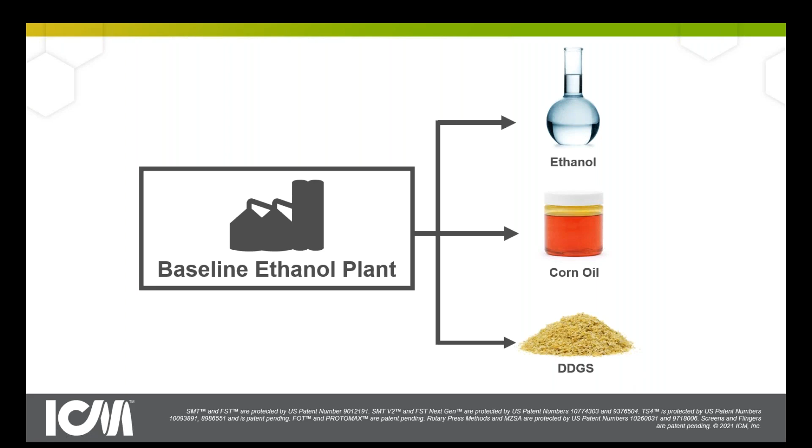And so as you go down to the bottom pile shown on this slide, you can see the dried distillers grains or even the wet distillers grains. That's really where we see the greatest opportunity for improvement.

A big reason for that is because DDGs are, our nutritionist likes to say, a perfectly imperfect feed. What they mean is it's a valuable feed component. It's the components of the corn kernel that have been through the ethanol process and now they've come out the back end and there's value there, but as they sit, it's a combination of the protein, the yeast, the fiber, and the oil that's not really uniform and perfect for any end user.

The industry has done a really good job over the last 20 years developing markets and maximizing the value of it. I talk to producers now and they're getting 110, maybe 120% the value of corn out of their DDGs, and that's great. But as that stands, there is the opportunity to do things a little better.

But standard DDGs, in terms of having an opportunity into the highest value, highest opportunity markets with aquaculture or pets or even beyond, there really is no opportunity for standard DDGs.

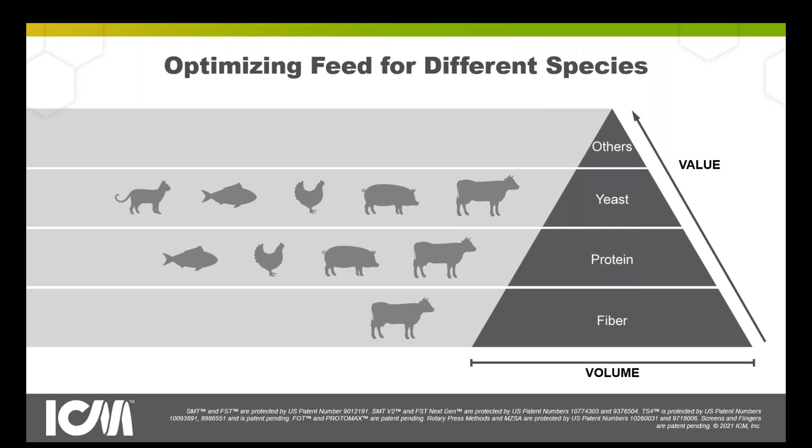That's really the focus of ICM's APP system. It's giving the ethanol plant, the biorefinery, whatever they choose to be called, the opportunity to diversify those feed products and maximize the value of that process stream coming out the back end of the plant.

So I want to focus on the protein moving forward. And we do get the questions of, is there demand for protein to go beyond? If every ethanol plant in the country adopted a technology to allow them to diversify their feed and produce a high protein feed, is that market going to get saturated? Is it going to decrease the value, or are we going to completely saturate it to where there's no home for it?

We like to confidently say that the opportunity for protein is about as close to unlimited as it could be, as you look at world population growth and just the opportunity for protein to continue to be a product in demand.

This is one study we like to reference from the FAO Agricultural Outlook, where they talk about by the year 2030, there's expected growth in beef, swine, and then the poultry and the aquaculture, getting up into the 19%, 13% growth, 43% growth, 35% growth. That's significant growth expected for these markets.

I also get questions on some recent news with the soybean meal facilities that are being built. Those are all really good projects, I think, that will be going on. But as there's more soybean meal out in the industry, there's still going to be a value for a corn protein coming out of an ethanol plant. We like to say that as the soybean meal has a certain price point, there's a pretty consistent history of there being a spread between that soybean meal and distillers grains, and then even to corn.

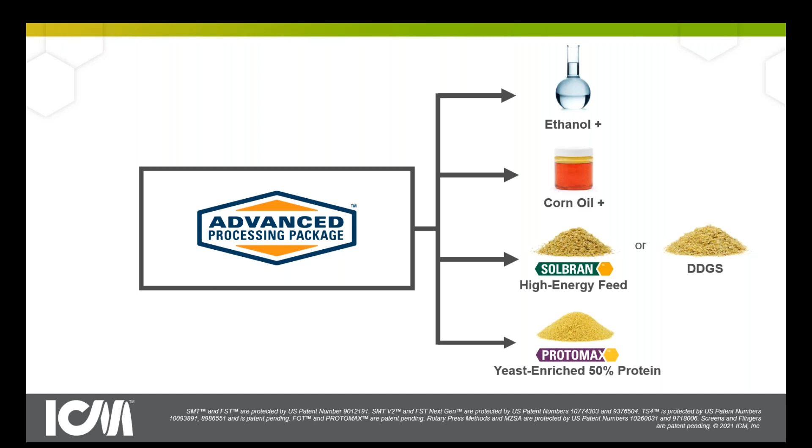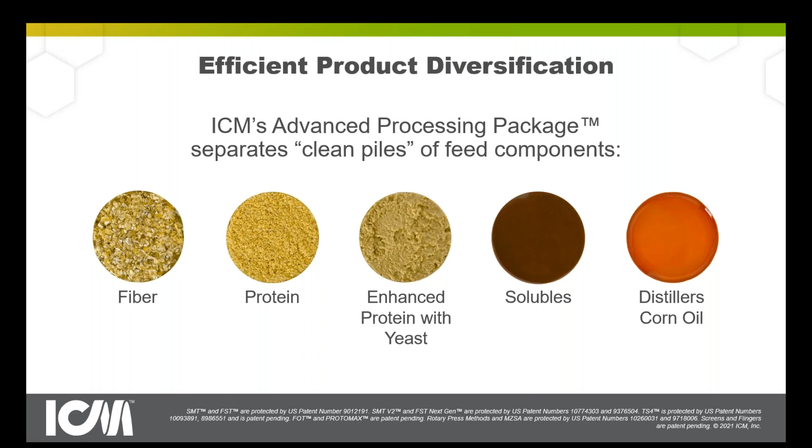So this is a transition slide. I'm showing you essentially the dots or pictorials of the clean process streams that are going to be flowing through the ethanol plant that has our APP system in it. We're going to have a clean fiber pile, a concentrated protein pile or process stream, an enhanced protein with yeast process stream, and a different and new solubles or syrup process stream, and the distiller's corn oil. You're going to see on these next few slides, as I show some process flow diagrams, where these play and how they are separated out within the ethanol plant process.

Before I go into that, I'm going to start with just the baseline ethanol process, kind of an ethanol 101 type slide, and focus on what we're doing with the mechanical, chemical, and biological systems in place. Then we'll talk about how when we add the APP system, we're really just adding capabilities for particle size separation and density separation to plug and play within this process stream.

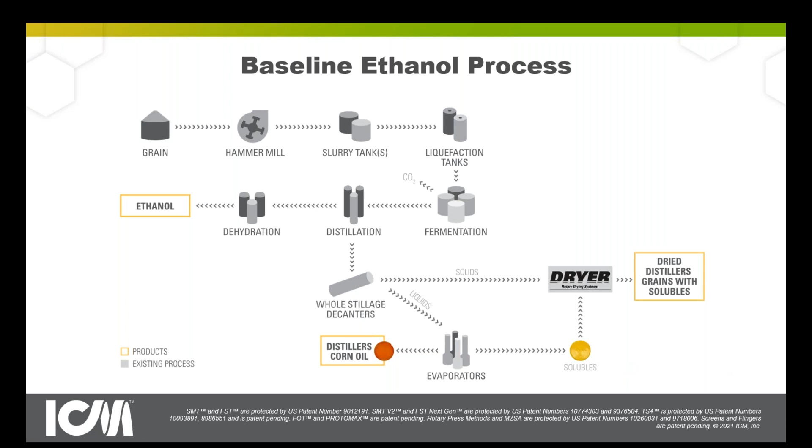So this is the base process flow diagram I'm going to be using. As I go to the next slide, boom, we're going to drop the APP process right on top of it.

Now, as I move into each one of these technologies, I'm going to advance the slides, and we're going to see these highlighted in green, which gives me a slide or two for each technology to talk about them a little bit independently.

Each one of these technologies does provide value on their own. The selective milling technology we've put into 40 plants or more, and we've seen significant benefit from that. But what I'm talking about mainly today, due to time and focus, is how these technologies plug together and play together within the APP system, driving us towards those high value, high protein products.

So as we highlight the first one, we're going to highlight the front end of the plant, and we highlight not only the SMT system, but the milling as well.

One of the key things we want to do within the APP system, since it's fully integrated and we're looking at doing separations throughout the entirety of the plant, is we want to start at the very beginning and not make a powder, not make a really, really fine product out of the dry kernel corn if we don't have to.

So the first thing in terms of process flow from front to back, chronologically, is with the milling, we're going to do an adjustment to the plant's dry milling system and give them an upgrade that allows them to do the same thing in terms of preparing the corn kernel for conversion to ethanol, but in a way that does not break down the particle size of the fiber.

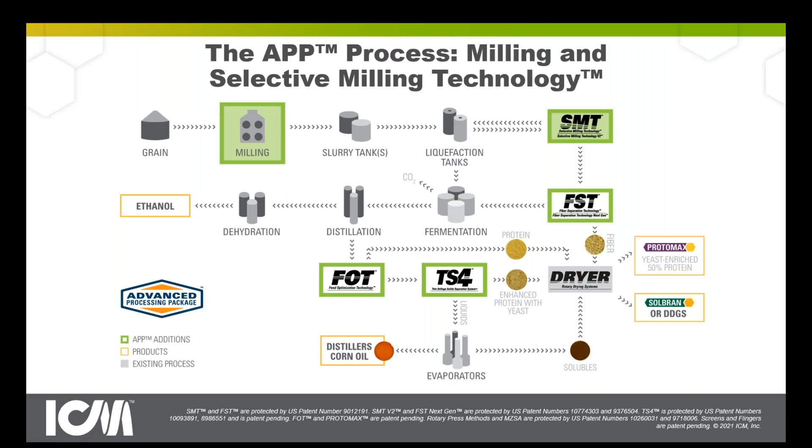And then moving forward, the SMT is a selective milling of the wet process stream, and so that brings a benefit with it as well.

But anyway, we're doing a wet grind and a nice aggressive grind of the larger particles in the liquefaction flow that have the most opportunity. Those larger particles have the most opportunity of passing through the front end of the plant, not allowing their starch to be broken down and available for ethanol conversion, or it's protein and fiber and other larger particles that are bound together and not able to be separated like we want them to be. So our SMT does a good job of doing that.

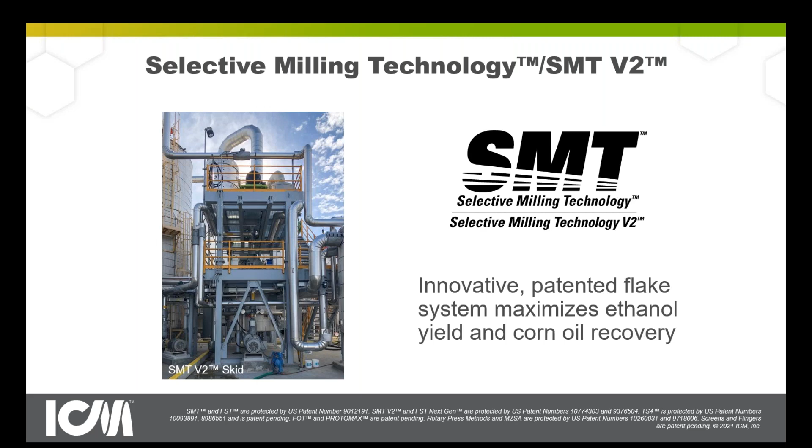And again, with the grind, our front end, what I'm going to call dry grind upgrade, we're able to get a right-sized grind. In this picture, if your screen's clear enough, you can actually see the larger sizes of the fiber, or the pericarp, which is that outer layer of the corn kernel. You can see that it's prepped and well set up to go through our separation devices on the front end of the plant, allowing that fiber to be cleaned and washed and separated without forcing a plant to try to separate a fine grind, powdery, broken down kernel of corn that brings difficulties along with it. So that's what we're doing at the front end of the plant.

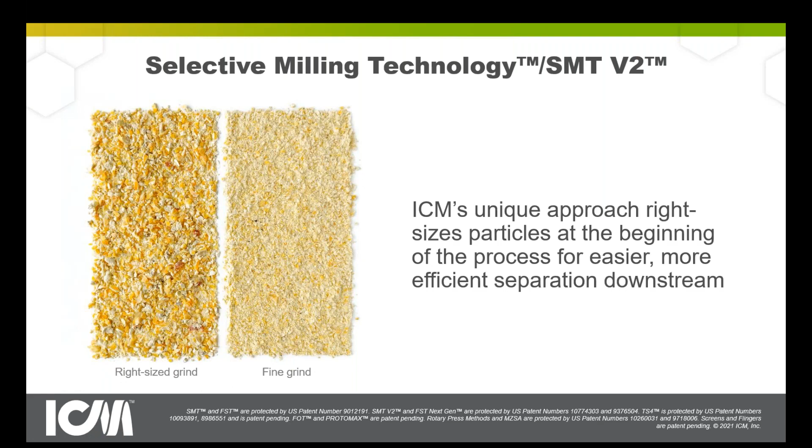From there, we're going to move into our fiber separation technology. So with our milling and our SMT, we've prepped everything. Prior to that, with slurry and liquefaction, we've given the necessary time and temperature, the opportunities for the biological processes to start, the chemical processes to happen. And now we move into our FST, and our FST is really a workhorse of the system.

The FST is where we are doing those particle size separations of the fiber and then doing a countercurrent washing of it, washing the protein, washing the starch, washing the fats and oils away from that fiber so that they can flow through to fermentation where they bring the most value.

And then that clean fiber pile can bypass fermentation, and it can bypass distillation. It can avoid the plate and frame heat exchangers that are involved with fermentation and the ones that come before it, and the beer mash exchangers. It can avoid the pumps. You no longer have the fiber providing wear, and it can avoid the beer column where really there's just zero value in the fiber being there. And so we take that clean fiber, we separate it, we clean it, and we allow it to bypass those middle parts of the plant.

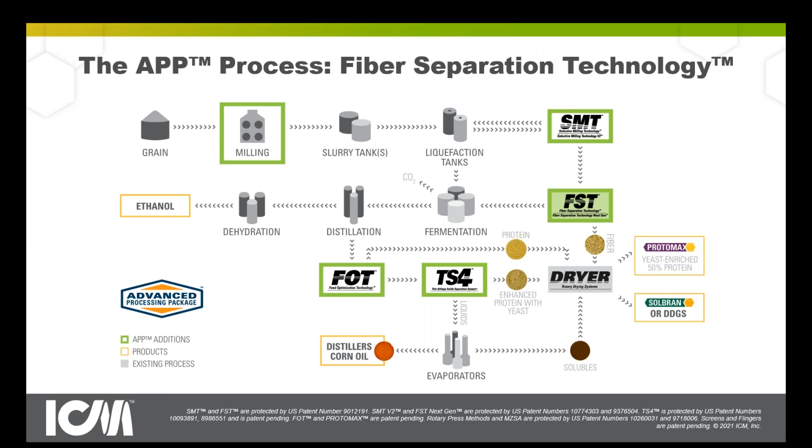Along with that, we bring that opportunity for increased plant rate. If fermentation, if distillation are a bottleneck for a plant, FST can bring up to 14%, a 14% increase in grind capability. So that's a pretty significant opportunity.

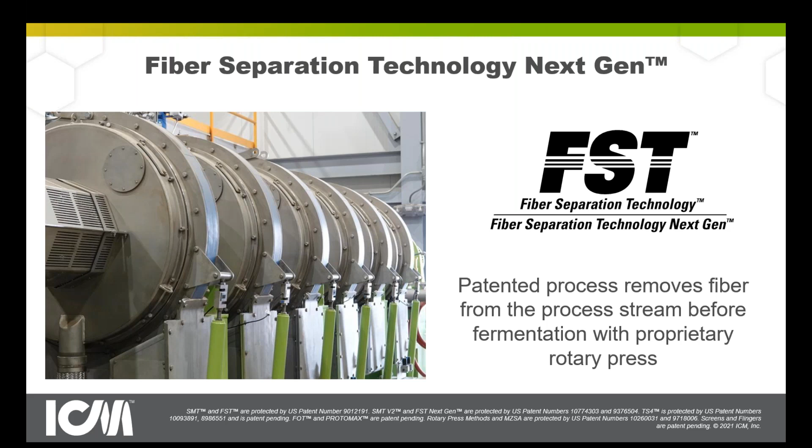And a couple of the other things FST is doing, off the back end of our FST system, as we're doing the dewatering and then the washing and then the dewatering, our final dewatering device is what you can see in the picture on the left. It's a rotary press. This is a very exciting piece of equipment. ICM's partnered with Fournier, that's one of our vendor exclusive partners that's been very strategic for us, and we've modified this system from the wastewater treatment industry.

And this is actually one of the highlights of the tours for me, one of the highlights of the tours as we have customers and other vendor partners come through our element plant. We get to the press and we've got a sample portal right there, and you can get a sample of this clean fiber. You can put it in your hand after it's cooled a little bit, and you can rub it together, feel how smooth and non-sticky it is.

You can tell that the sugars, the starches are just gone. The really cool part is it's now a process stream that is 40 to 45% solids, and that's what heads to the dryer or to the wet pad. If that's going to the dryer, that's a 40 to 45% solids process stream, which has significantly less water than what the wet cake would be coming off of a baseline ethanol plant centrifuge at roughly 35% or 36% solids.

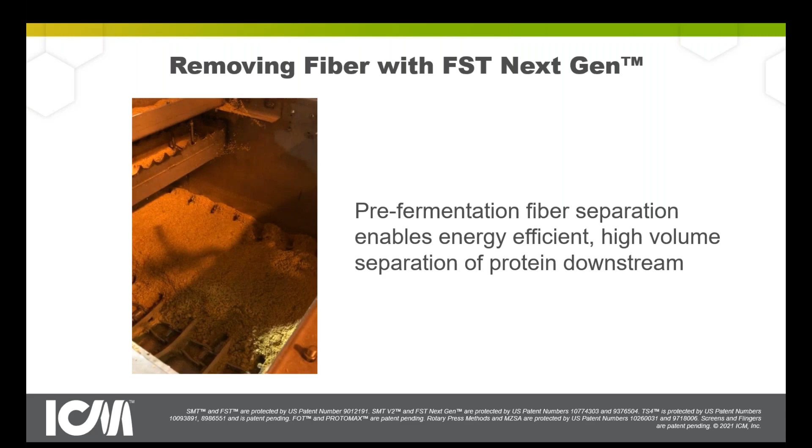So that's one of the key benefits of the system, and one of the ways we're able to reduce natural gas and provide some reduction in CI scoring is through that reduction in natural gas due to feeding the dryers a process stream with less water load. So that's our FST system, one of the key workhorses, with multiple benefits coming along with it as we separate the fiber in front of fermentation and distillation.

So now we'll continue to move and get to our feed optimization technology, or FOT. FOT is a really cool new technology, because what we're doing is taking the plant's existing centrifuges or decanters, that typically handle whole stillage, dewatering it and sending a wet cake to the wet pad or the dryers, and sending a liquid thin stillage flow towards the evaporators or back towards backset. We're taking that process step and upgrading those machines.

This is where we work exclusively with one of our other strategic vendor partners, Flottweg. So if a plant has existing Flottweg centrifuges, we're going to take those machines and modify the internals, modify the drives, and add a wash stage in the middle, basically turning that centrifuge step into a two-step process. We're able to do that due to those modifications we've made to the centrifuges.

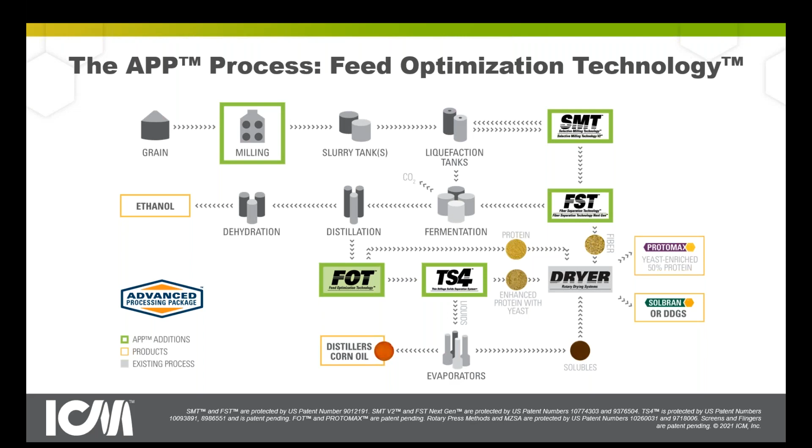For customers we're working with that don't have Flottweg machines, they've got a different provider. Most of those plants, or those specific centrifuges, are in a period in their life cycle where they're nearing their limit anyway. So we're going to replace those machines, add the Flottweg machines with new internals and new drives, giving them machines with increased capacity and increased ability to do a density separation, and have that run through the FOT process.

Coming out of the FOT process, I've got some other videos to show you. First, I'm going to show a picture of that new internal scroll, actually called an accelerator scroll from Flottweg. That's what that new internal bowl scroll looks like.

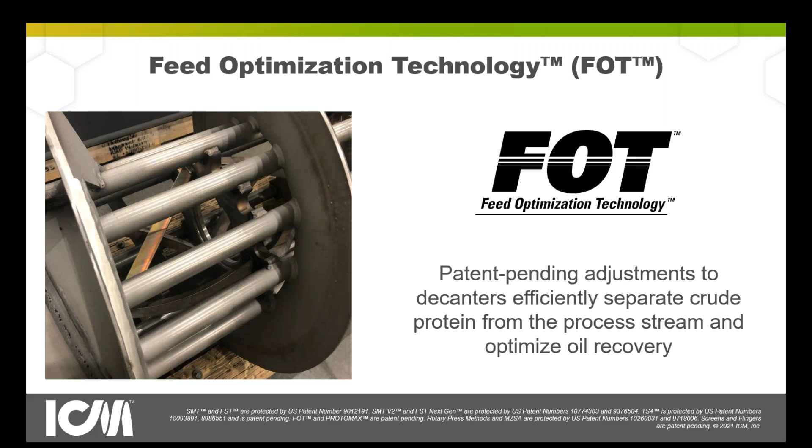So instead of having your normal cylinder-looking bowl that fits inside of the Flottweg machine, this is what it looks like, and you're able to get a deeper pond depth and do a more aggressive separation with this, as well as having more capacity within the machine. We'll go into that in more detail and depth in a future webinar.

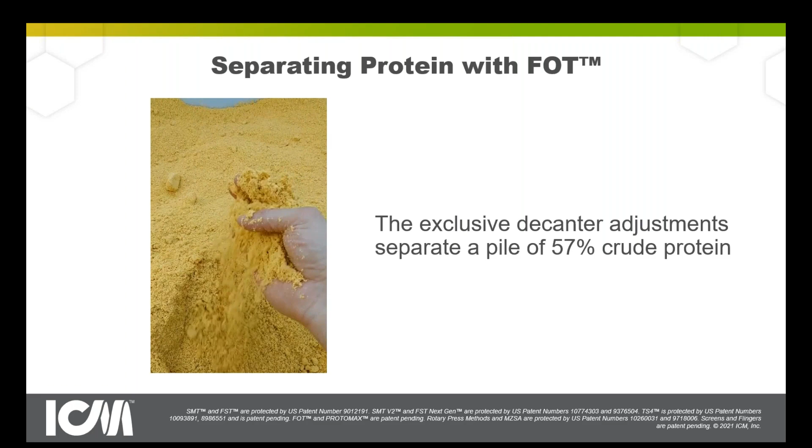This is Jeff Sharping's hand, I believe—I'm throwing names out here. But you can see how the wet cake, if it normally comes off a standard decanter, it's clumpy and it clicks together, and as it's feeding the dryer, you can kind of feel and sense the moisture load that's in there. This cake looks and feels a lot different. Again, this is another process stream we can show as we do the plant tour, and you just get that feel for how it's different and how it's a better process stream to feed the dryers. So that's a fun video to share.

And then after FOT—so I want to highlight, again, coming off of FST, we have the clean fiber pile. Now coming off of FOT, we've got the concentrated protein stream.

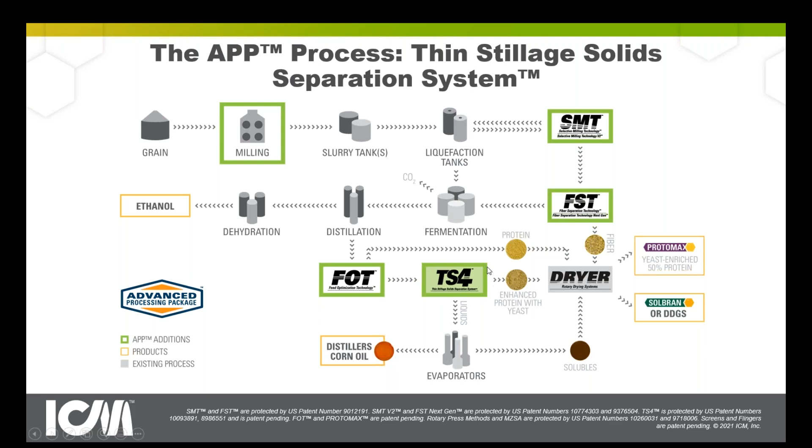And then the liquids that come off of FOT, that standard thin stillage process flow now without the fiber in it - that's what's now feeding our thin stillage solid separation system, or TS4. Chronologically, that's going to be the last ICM technology that we're flowing through.

What TS4 is, is another set of Flottweg decanters, Flottweg centrifuges, but these ones are actually Sedicanters - a little bit different machine, different setup. They're designed to give a greater G-force that allows us to do a more significant density separation on that thin stillage stream that has suspended solids that are lighter, fluffier, and more difficult to separate through a standard machine.

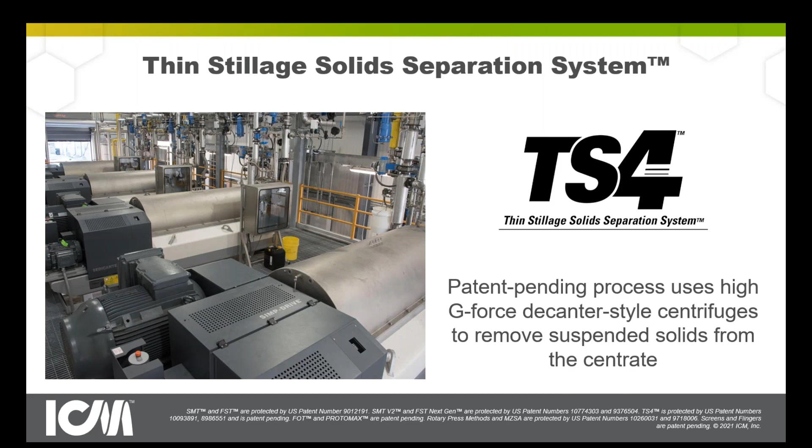And then the cake that comes off of these SETI canters, we call it SETI cake - this is the yeast-enriched protein concentrated pile. This is what it looks like as it flows out of the Sedicanters. You can see the almost soft serve ice cream type feel, and it flows really well back into the conveyors, mixing really well with that other concentrated protein stream we talked about that comes off of FOT. These combine together to produce the Protomax feed product.

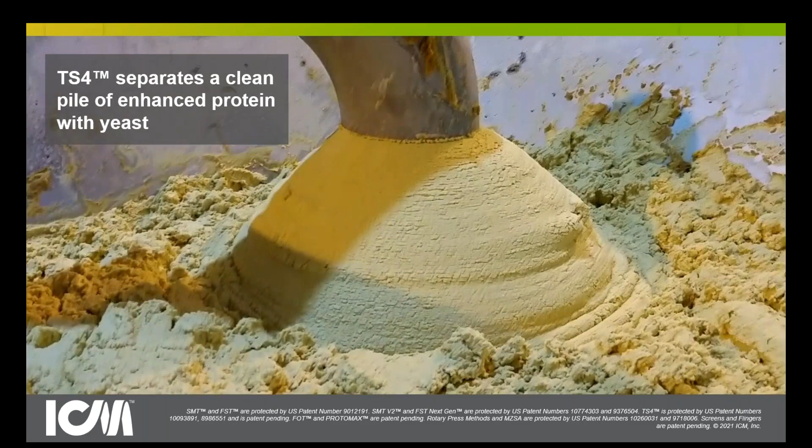That's a little too jerky on a normal presentation - I'll let this flow for a while because it's fun to look at, but it's definitely a unique and neat process stream to handle and to feel.

And then the liquids that come off of TS4 - any producer, any vendor, anyone who's been around the ethanol plant and seen a spin down of thin stillage can relate and recognize what these vials are showing. A typical thin stillage sample, if you put it in a centrifuge and spin it out, you're going to have what we call a pellet, or a layer of solids that show on the bottom of the tube, right around that 10% range or more. That's what this picture is showing.

With our TS4 system, as we've removed those suspended solids, the spin down pellet is a lot smaller. The way I like to best describe TS4 is: on the back end of the ethanol plant, you've got really two systems that are dewatering final products, or products going towards the back end of the plant. You've got the dryers and you've got the evaporators, and the evaporators by design do a really good job of evaporating water out of a liquid.

The dryers do a really good job by design of drying water out of a solid. What TS4 is doing with this thin stillage stream is it's taking 50% or more of these suspended solids and sending it to the dryer, where the dryer can dry the water out of it most efficiently. The remainder of this liquid, we allow to go to the evaporators without those solids in it, so the evaporators can evaporate the water out of it most efficiently. That's what TS4 is doing.

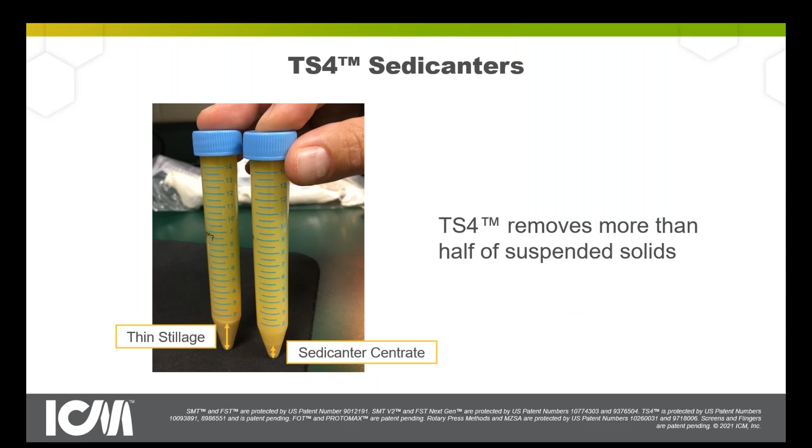Another key thing the TS4 is doing - as it sends less suspended solids to the evaporators, we're now able to run the evaporators differently and drive the solids up within the syrup or within the solubles. As we're doing that, what's been really neat to see is that we increase the solids within the syrup, but we don't increase the viscosity. So we're not seeing a huge gain, buildup, or plugging in the evaporators.

We're not seeing a discoloration that affects the Hunter score of the feed product. We're literally just letting the evaporators pull water load out and then produce clean water from that evap condensate, but ultimately do it more efficiently and do it better.

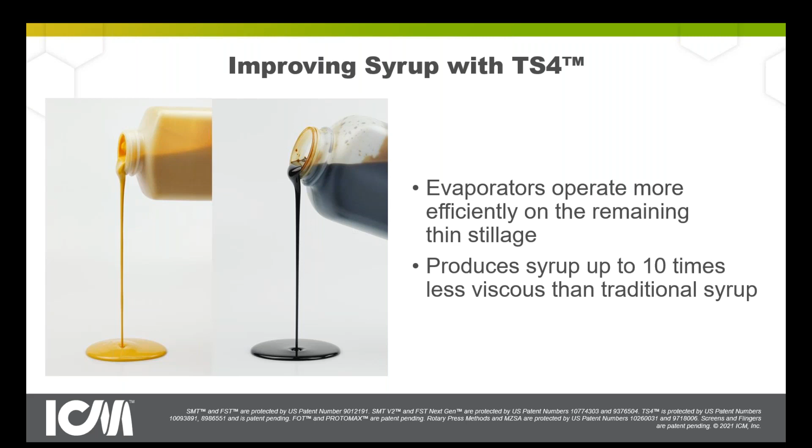Driving towards the end of the presentation, the last thing we're going to highlight and talk about is the ICM rotary dryer system.

I've been with ICM for 17 years this month, and I started working for the ICM dryer group. I was pretty blown away as I came into ICM and saw all the levers and complex controls, everything we had within our dryer system that could give a plant different ways to run it. In that 2003, 2004 window, all those levers got pushed aside in favor of maximum production, maximum production, maximum production.

So it's been really exciting for me to see as we've shifted towards a more specialized high protein feed product, we've been able to really see what the dryer system can do with a concentrated, high value, high protein system, how we can control the temperature and airflows, and do what's needed to gently dry that product and allow it to get the maximum value as a feed product.

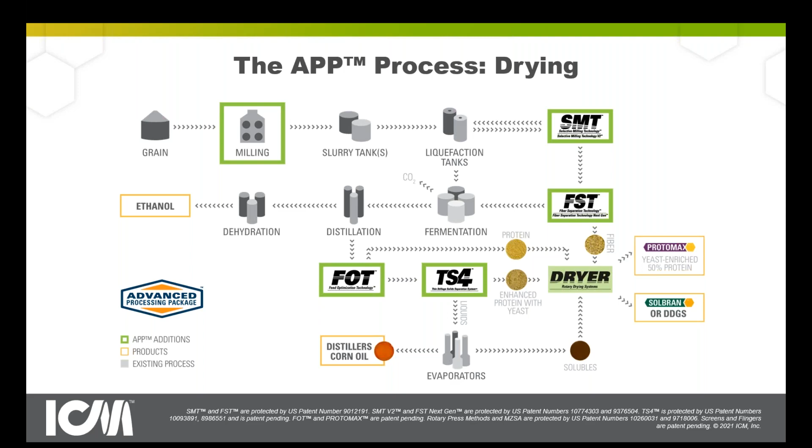A really cool thing this does is for any plant out there with the existing ICM dryer system, we're going to put the APP system in and run the high protein through your existing dryers, allowing you to produce the high value 50% protein feed product without having to add a new dryer, without the CapEx and ongoing OpEx, and without that lack of user friendliness those potentially bring.

We're doing it here at Element. We love showing that off, watching customers pull a sample off the back of the dryers of the Protomax or the Advantage 50Y, feel it, touch it, taste it if they're so inclined, and see that that's being done through the ICM dryers is a very, very good and exciting thing.

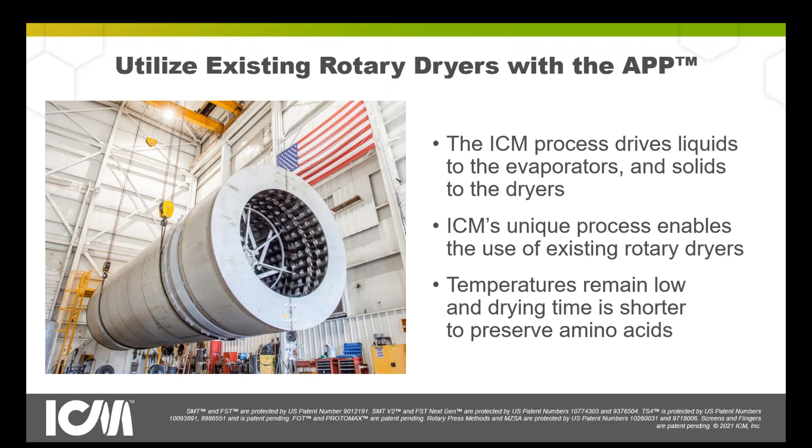That's a good way to show you, with simple variable addition, how we're producing that. The Solbran high energy feed product would be that clean separated out fiber combined with the syrup or the solubles. And if you're wanting to produce a standard distiller's grain, something you absolutely can do with our system, we're going to take the protein, the bran, and the syrup, and combine those together. This protein is basically what you're able to trim off and produce this dry distiller's grain at whatever protein spec you're wanting.

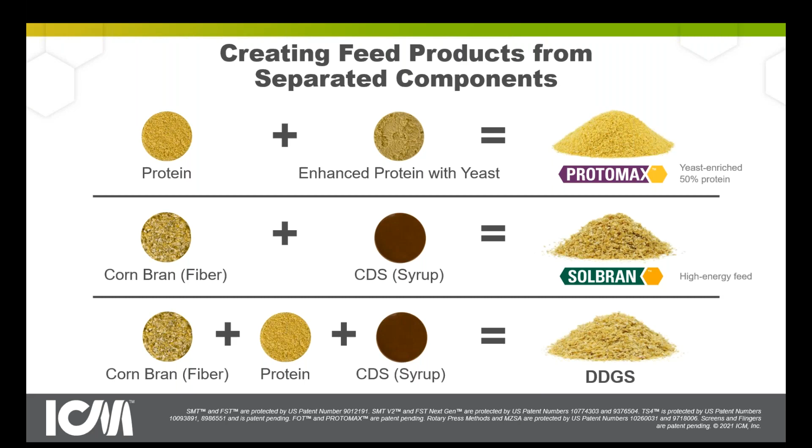So this is a good way to show you how we're allowing a plant, a customer, to combine the products and process flows to produce the feed products, giving them the greatest opportunity for making money. And what that looks like in terms of opportunities with the end users, the species, or the feed markets.

So the 50% protein could still be fed to beef cattle, but I'll be honest, they're not going to pay enough for it. There could still be benefit there, but that's maybe a future play if they ever see the value. But specialized dairy would have opportunity, and that's kind of what we would consider the floor pricing. There's opportunity there, and then you can very much get into the swine, poultry, aquaculture, and pet food arena with this feed product. It opens those doors, gives the ethanol plant the opportunity to get the most value possible out of a feed product.

The Solbran—so if a plant is maximizing their yield of Protomax and they're producing a Solbran, it's a high energy feed, very well suited for a ruminant, for both beef and dairy cattle. Great opportunity for the high energy feed.

And then obviously standard distillers grains are going to go into whatever market the plant has already worked decades to develop and sustain. If that's where their best opportunity for money is, then standard distillers grains can continue to feed those markets. And then just one more picture about how these play out in terms of the yields—these are theoretical numbers, but good knowledge for folks to have.

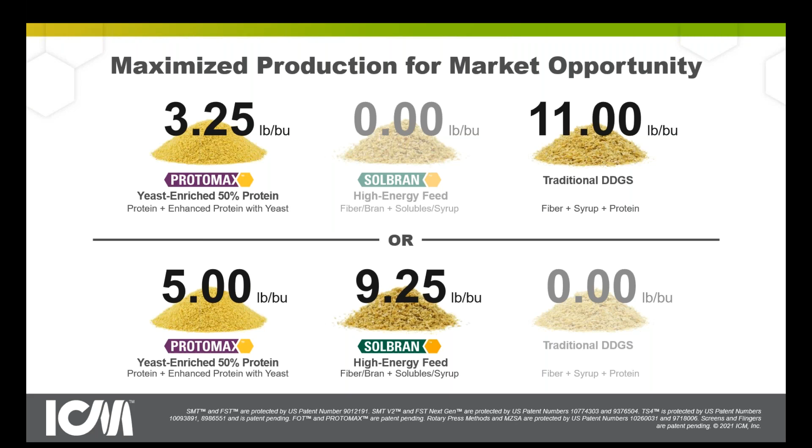We want to be open and honest with the customers about that. So there is an increase in expense to running the system.